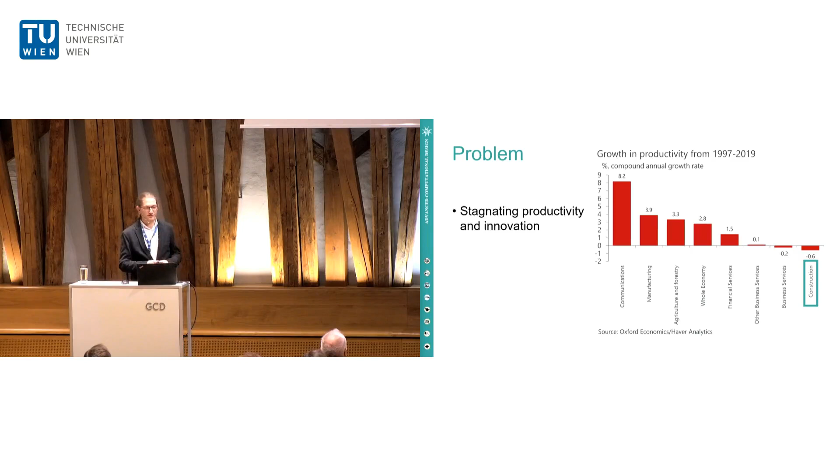And as a result, while we face these challenges of urban growth and scarcity of resources, the vast majority of AEC still uses conventional processes and standard wasteful materials, causing a huge ecological impact. So the obvious solution to this problem is to create digital design tools for the early design phase. I mean, you have seen many digital design tools already for later design stages, but we are talking about the early design phase. And this is obviously using the field of information and communication technology, where you have seen that our dean gave in the opening address the reasoning for that.

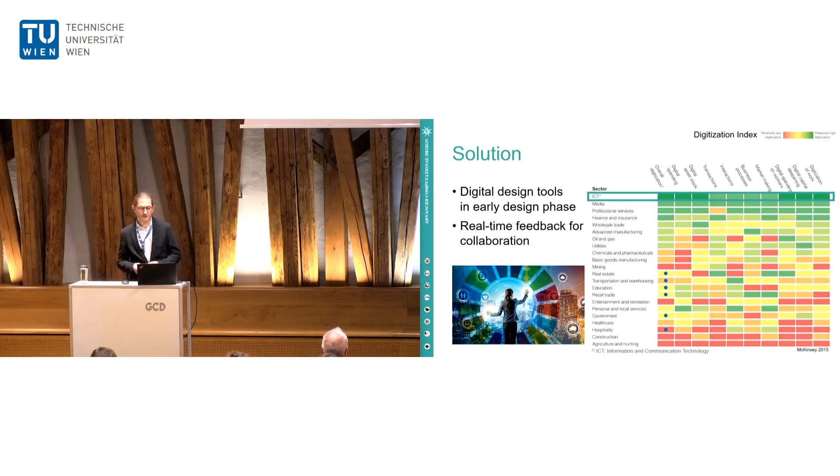So such tools would allow real-time feedback and communication on design choices across different disciplines at an early stage of a project where there's the most impact. However, the computer scientists developing these tools, us, often lack the domain knowledge, leading to suboptimal solutions. In fact, none of the big software companies in the industry have even tried offering such tools for the early design phase so far. So this is where our project comes in.

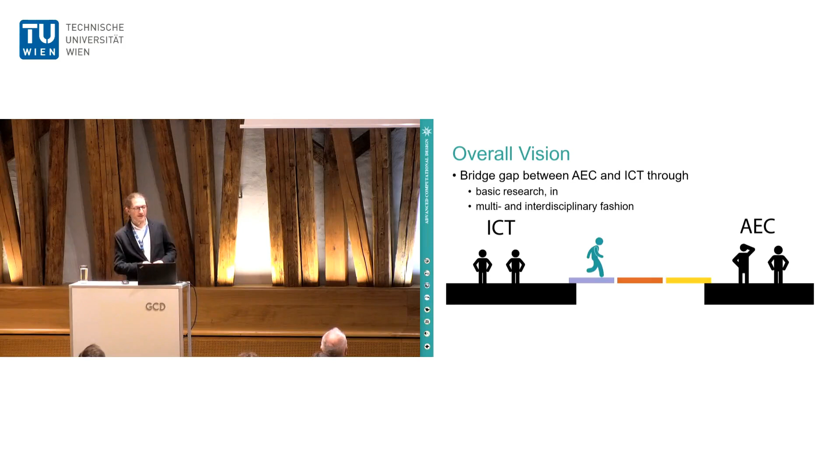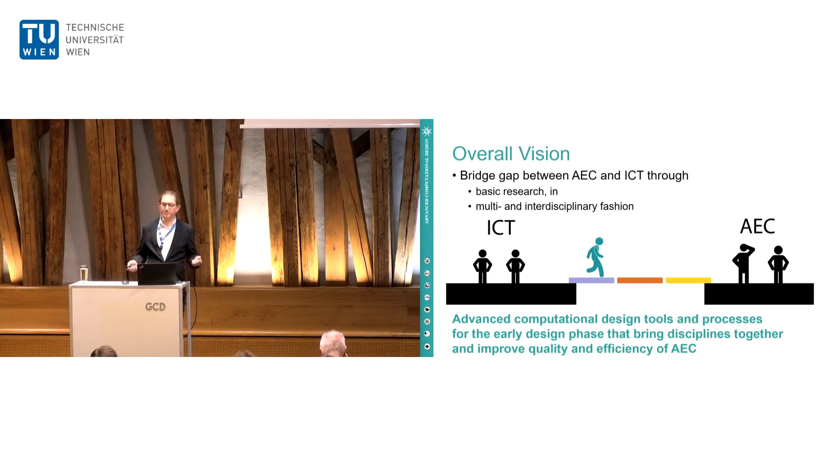Our overall vision is to bridge this gap between AEC and ICT in the early design phase through basic research in a multi- and interdisciplinary fashion, as you have already heard in the introductory address. Now, for more than 3 years, the SFB Advanced Computational Design has been developing such tools and processes for the early design phase to implement that vision. Tools that can bring disciplines together and improve the quality and efficiency of AEC. So this requires work in 3 primary areas.

First, design methodology in order to provide the primary interface technology to the human designers and specialists. So we deal with the question how they input design ideas and communicate with each other, but also how to integrate computational tools from all other disciplines. And the second is visual and haptic interaction in order to provide feedback for decision support and communication at all times during this early design phase.

And third is form finding, or the actual realization of design intents in actual objects that have geometric, kinematic, or physical properties. So roughly, the first area covers the input side of a design project, the second one, the output side, and the third one, the processing or simulation side.

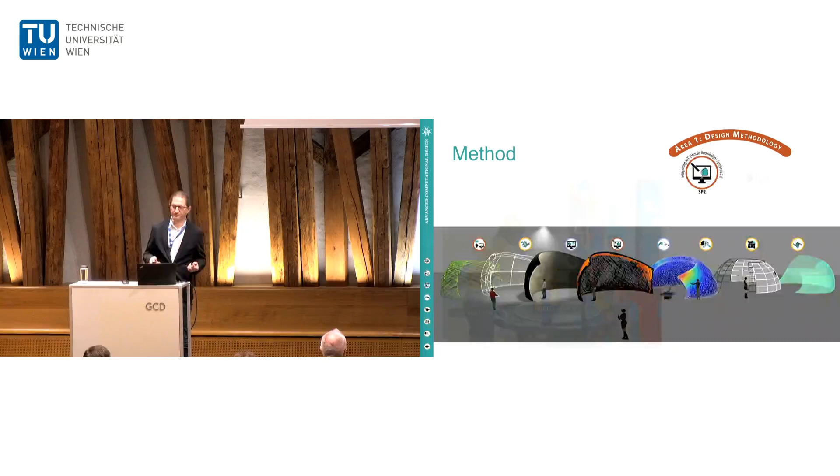In more detail, in this area 1, we follow two complementary approaches of design methodology. On the one hand, we are working on transforming implicit design intents given by sketches on 3D drawing canvases into geometric surface models. These surface models then serve as explicit representation for integration with the computational tools. And on the other hand, we look at a more physical interaction to create variations of volumetric point clouds using machine learning, allowing the exploration of larger and more abstract design spaces. And more details on that will be presented later in this session.

In area 2, at any point in time, the current state of the interaction is presented to the user as accurately as possible. On the one hand, visually, through a real-time simulation of light propagation through the scene, and on the other hand, also through the haptic sense, allowing users to experience the boundaries of architectural spaces or material properties like elasticity. So you will learn details on the robotic system we developed later on in this session.

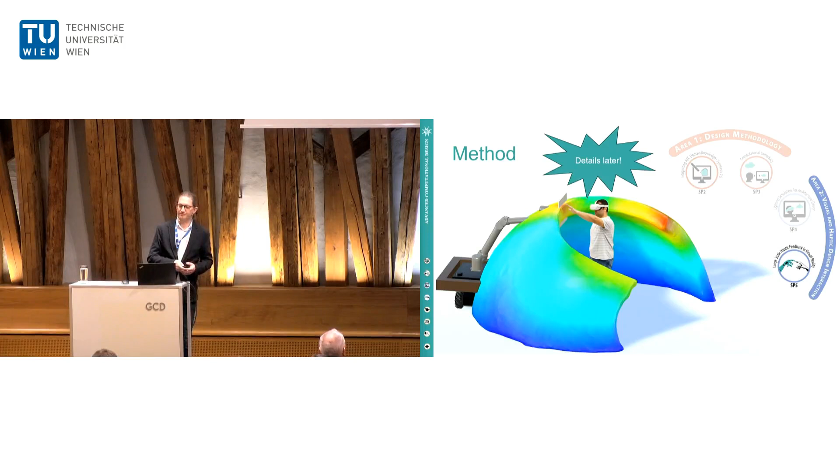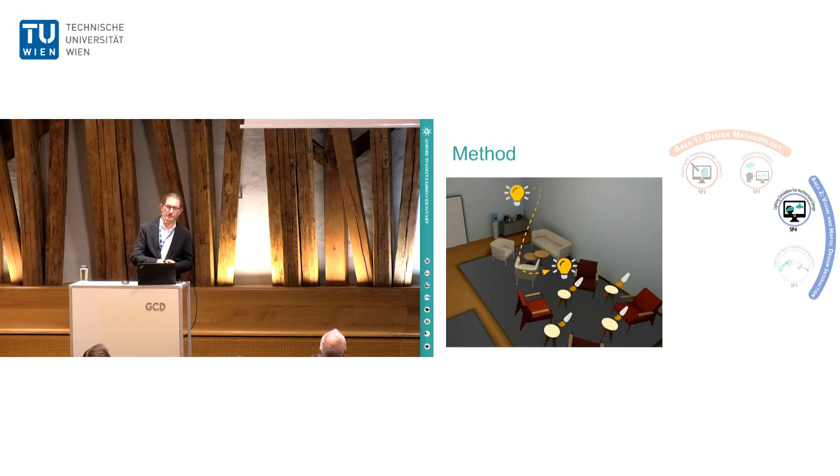Going back to the visual interaction, this also works in a reverse sense. By specifying desired illumination properties, the simulation can be used to calculate the required illumination setup through a novel differentiable light tracing method. And we also extended the approach to simulate thermal radiation, as will be presented later in this session.

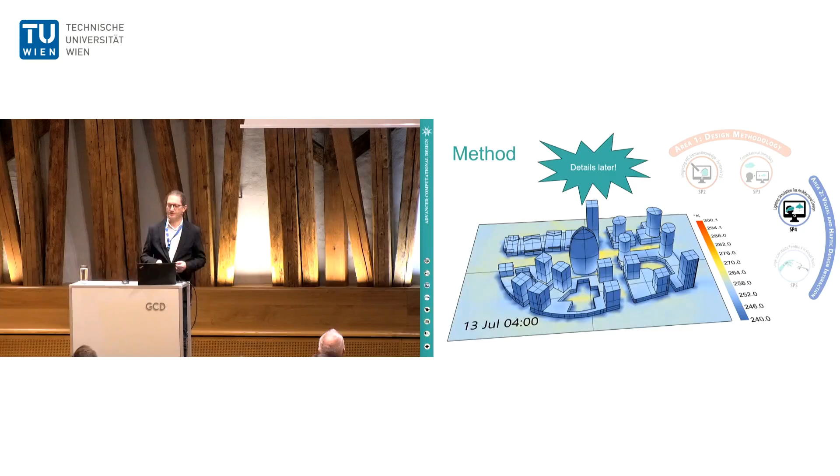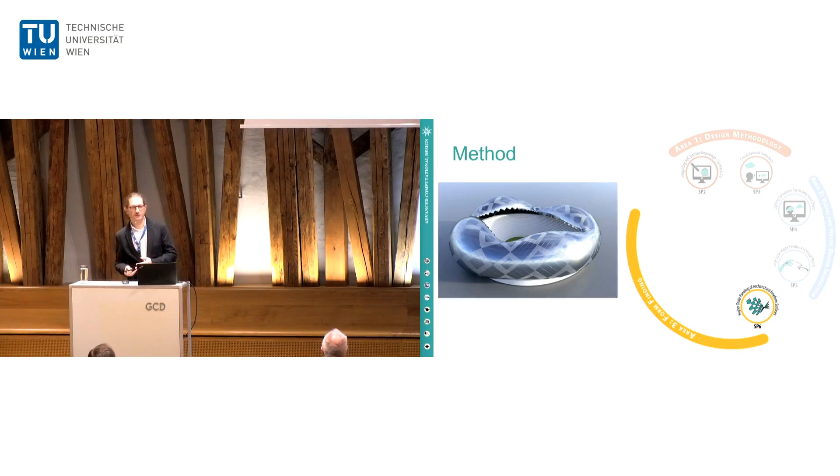In area 3, form finding, instead of deferring the complex geometrical and mechanical computations to a later stage in the production pipeline, our approach is to integrate form finding already in the early design phase. For example, the possible ways a freeform surface is discretized into panels determines the feasibility, efficiency, and cost of a construction, ultimately with an impact on sustainability. But we also go beyond static surfaces and find innovative ways to transform quad-paneled surfaces with applications to novel lighting and shading solutions, foldable assemblies, as you have seen in the first keynote talk as well.

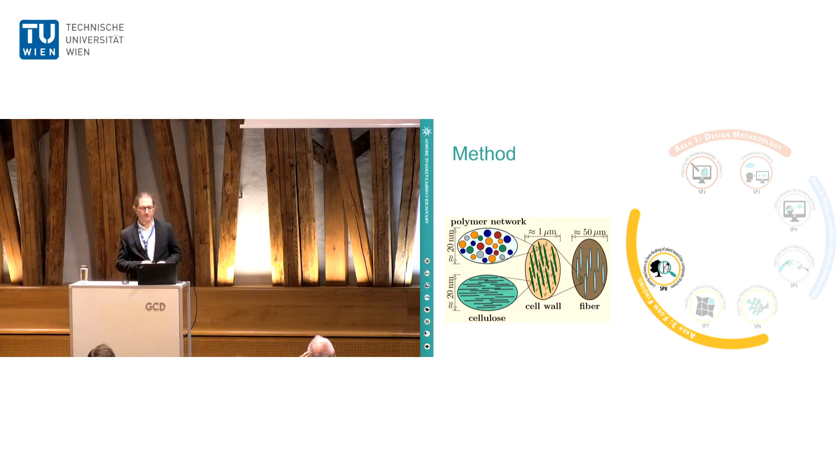Besides geometry, looking at the structural behavior of design is essential in order to introduce new and green materials, like so-called plant-based biocomposites. For these materials, we developed a multi-scale model to simulate their behavior much more efficiently. And in particular, later in this session, you will learn how we analyze the formation of cracks in these materials.

Finally, we verify theoretical results experimentally by fabricating or building them, which is really important. But also we experiment with completely new materials like clay or mycelium and their potential for sustainable construction. The properties of these materials are then analyzed again theoretically. All of these projects are tightly interlinked, of course, as presented by this connection star.

And to achieve all this requires a multidisciplinary team, so I can introduce the people who are working on this project. At the beginning of the project, luckily, we were all able to build on this collaboration that was initiated by Helmut Pottmann here in the form of the Center for Geometry and Computational Design, which is the symposium we are having here. And then we extended this with knowledge in architectural design and material experimentation from University of Innsbruck and TU Graz. In total, the project encompasses 4 faculties: computer science, mathematics, architecture, and civil engineering. So I will show you now a few of the examples of how we worked together and achieved more than the simple sum of the project.

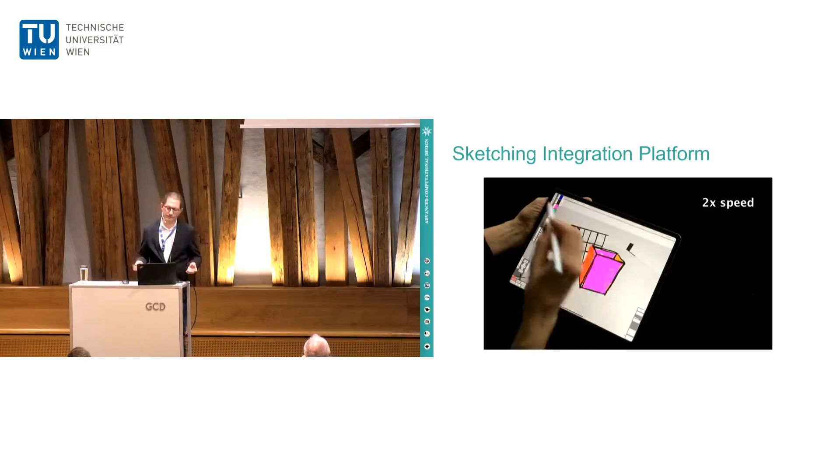So first of all, we have created a sketching platform as the central hub of all the sub-projects in the SFB. This platform allows users to sketch in different modalities, like on an iPad or in virtual reality. In particular, we have identified how architectural designers like to sketch, using different stroke types for the boundaries and the surfaces. With contributions from geometry, we developed algorithms to convert these sketches first into segmentations and then into curve networks and finally into geometric surfaces.

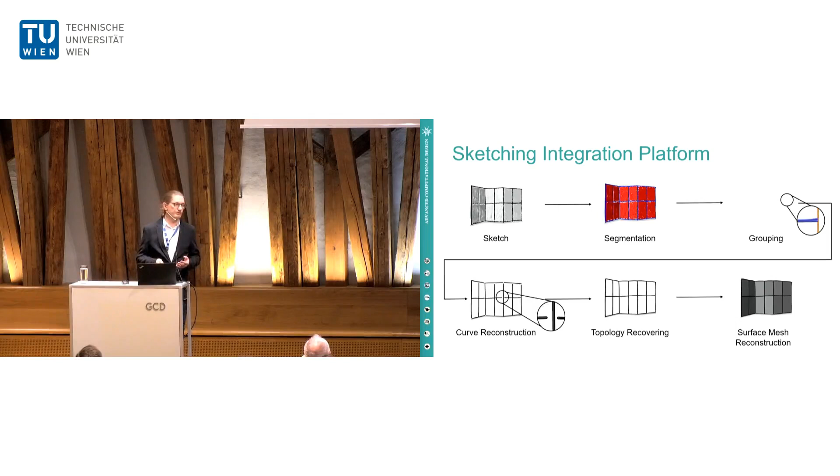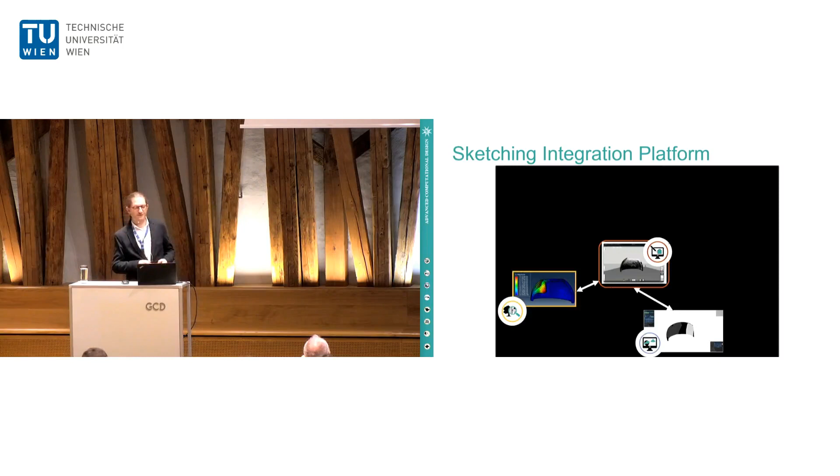The sketching platform then uses these surfaces to communicate with simulation tools. For example, with lighting simulation to compute optimal lighting conditions, with structural simulation to compute stability for different material choices, and with geometry simulation to compute different panelizations or transformable variations. The platform can also convert point clouds to geometry, and all of this will be reflected in the app and shown to the designer. And in certain modes, like virtual reality, the feedback will not only be visual, but also haptic, or real, through fabrication. And again, 4 of these topics will be presented in more detail shortly.

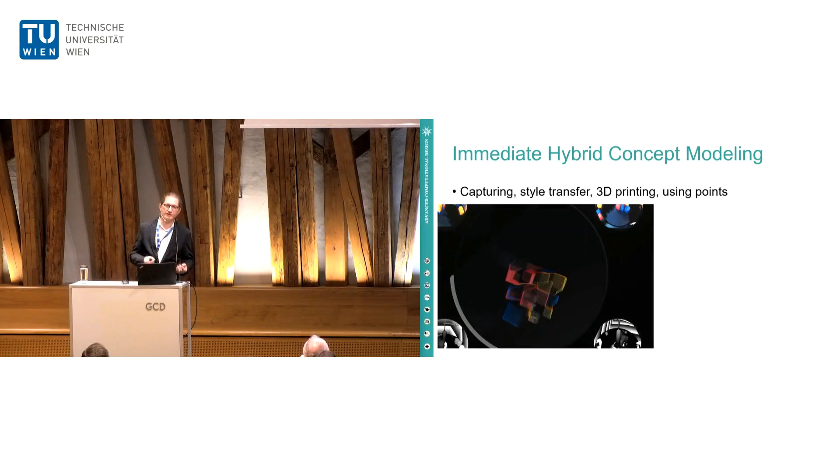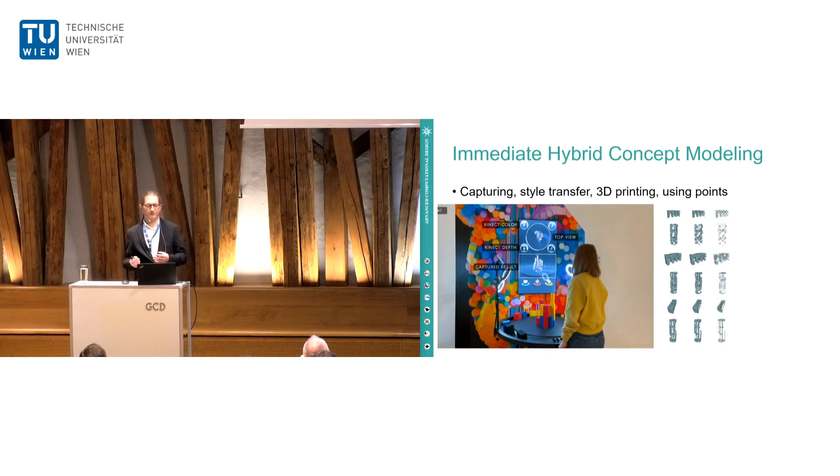As an alternative to sketching, we also collaborated in a more immediate hybrid concept modeling workflow based on point clouds. So here a feedback loop is established between the physical and the digital modeling. Through style transfer algorithms, the user can modify the point clouds according to different inputs and create variations, and also influence the material distribution, which is only possible since the algorithms also generate the internal structure of the point clouds.

And this in turn also allows evaluating the structural performance directly on the point clouds. And finally, the generated point clouds can be directly fabricated using a novel point printing workflow. And putting all these different elements together, we obtain a material-informed design framework, which equips designers with the necessary knowledge about design implications, starting from a sketch or a physical input.

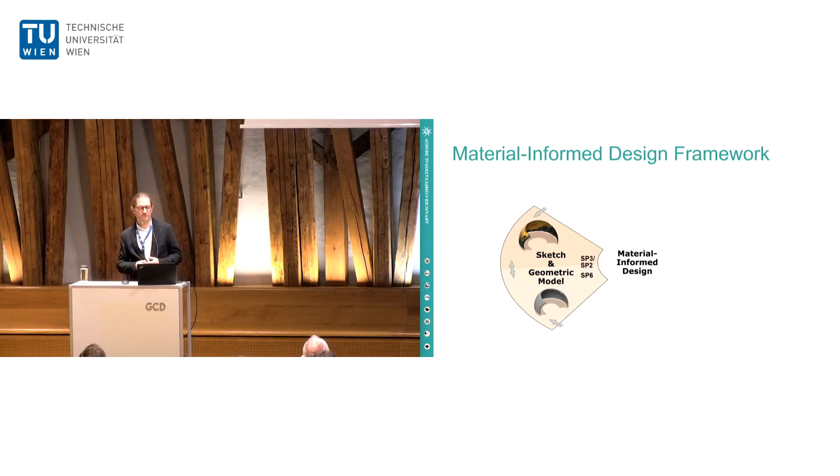The sketching platform or the concept modeling platform computes a geometric or point-based model, and this can then be interpreted by a structural analysis module for overall structural feedback, and by material models, for example, our novel model for plant-based biocomposites, which provide the mechanical input parameters.

The design can be visualized in virtual reality using realistic light simulation, and a novel origami structure positioned on a robotic arm allows for immediate haptic feedback on the structural stiffness. The framework also adds an important physical materialization step where prototypes of both materials and geometry are actually fabricated and presented to the user.

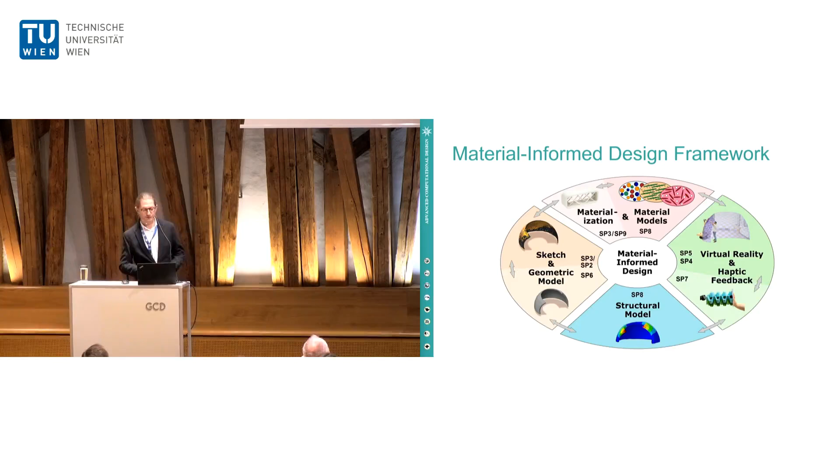So in summary, our overall vision is to develop advanced computational design tools and processes for the early design phase, linking design methodology, visual and haptic feedback, and form finding through basic and multi- and interdisciplinary research in order to improve the quality, efficiency, and sustainability in AEC.

And this is the team of PIs last week in front of the Austrian Science Fund before we gave a part of this presentation and other presentations, and which will decide on whether we'll get another 4 years of funding. So please wish us luck. Thank you.

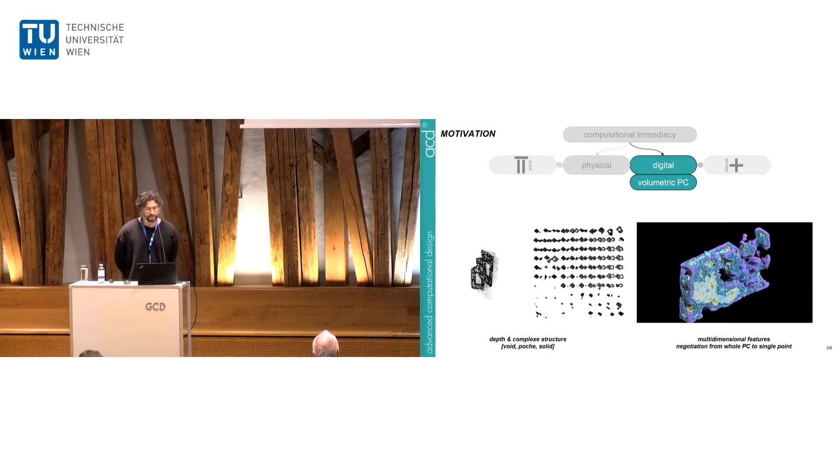Volumetric point clouds can be described as point clouds defined through their volumetric entity. Volumetric point clouds have a depth structure. They can be described by void portions, poches, solid areas, their skin, and their signals. Volumetric point clouds describe objects from the largest particle to the smallest, starting from the whole to the single unit. They are carriers of multidimensional information, such as color and distance to neighbors, and can thus describe different conditions, which we call attributes and features.

In summary, one of our main motivations is to apply real-time 3D machine learning assisted design workflows based on volumetric point clouds. Basically a process that utilizes unstructured point clouds as input, provides manipulations through different trained volumetric styles, such as lattice structures using an autoencoder, and enables conceptual models with informed multidimensional features as output.

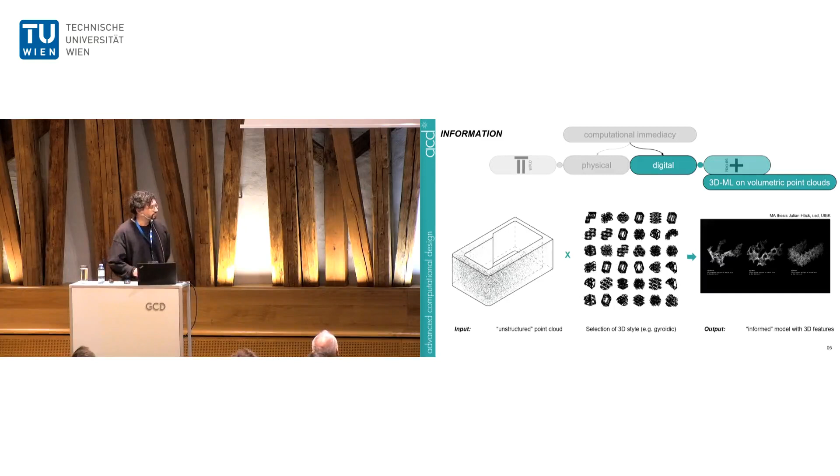The point cloud tectonics thesis builds on the computational immediacy research and connects to the hybrid physical and digital workflow being developed. The particular interest lies in considering how robotic fabrication based on volumetric point clouds informed by digital design features can encode and decode attributes that make the point clouds a design medium for volumetric conceptual models.

Volumetric negotiation of point clouds is fundamentally defined by the application of filter patterns, such as the application of flexible resolutions of volumetric point clouds: raw, adaptive, and rasterized. So we negotiate with rasterizations, but see a large potential in raw volumetric point clouds.

There are multidimensional local features to control, and furthermore they are especially suitable for embedding porosities. With raw point clouds, there are more attributes and information per point, which we can define, for example, by the position of the neighboring points, the volumetric size, and the volumetric position with different densities.

In our understanding, tectonics refers to the relationship between parts and the whole in order to describe a totality and thus a performance. Classic components of tectonics are columns, walls, ceilings, floors, and staircases, such as in the Domino house; you can see it on the left-hand side.

Digital tectonics has raised particular interest in the age of digital fabrication, as it allows tectonics to be digitally controlled and fabricated. Especially the extension of digital tectonics by volumetric modeling creates our great interest. Here the view behind the surface begins and reference is made to the inner volumetric organization.

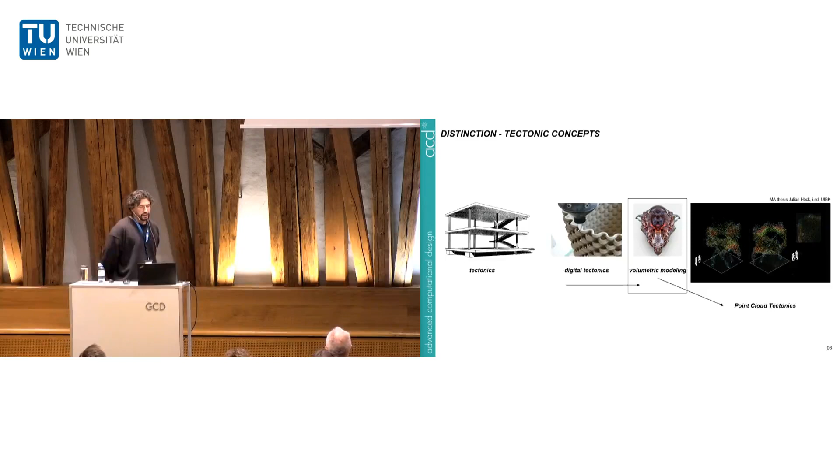Building on this, we would like to go one step further with point cloud tectonics. We see each point of structure as an elementary unit of the whole, in which the material and the internal structure can be adaptively designed. We want to zoom into the microstructure, giving each granule an individual resolution, feature, and meaning.

Continuous developments in the direct conversion of volumetric point clouds into point printing toolpaths based on informed granular data. The goal is the direct conversion of volumetric point clouds with 3D feature attributes into physical prototypes.

Volumetric methods are particularly suited for the manipulation of material distribution regarding graded and combined materials in the early design phase. We focus in point cloud tectonics on sustainable materials. In the first applications, we use clay as a point printing material.

To establish a definition of point cloud tectonics, we have created a large atlas of negotiation strategies of point clouds and concept models. This atlas is open to our students to adapt and extend technologies and techniques. Basic negotiation strategies are filtering of point clouds based on their densities, porosities, resolutions, colors, and describing tectonics by instances, volumetric data blocks, signed distance functions, or sphere packing, for example.

Design courses in particular serve to enhance scalable scenarios and expand the atlas of point cloud tectonics and how to incorporate new concepts of dealing with volumetric point clouds as design medium. In this project, the students investigated how to establish different resolutions of the inner volumetric structure by manipulating a raw point cloud in ordered octree structures. Each cell is now considered individually to create an inner structure that negotiates between void and solid.

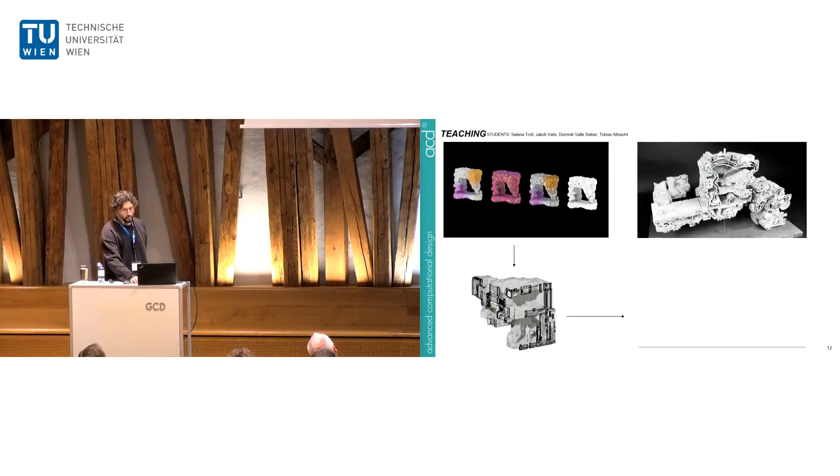In this project, the interest lies in how to inscribe transparencies in the tectonics of volumetric point clouds through a digital occupation and control of densities. Moreover, these ideas were materialized physically through studies of how to control the occupation of points through different densities, colors, and transparencies.

In this project, the focus was to get volumetric point clouds through CT scans, which were geometrically investigated. The idea is to create tunable granular data with adaptive scales from urban to human to the integration of nature, combined with a porous idea to inscribe spatialities and exposures.

Furthermore, one focus is the inclusion of natural material systems, here for example soil, in order to create different material resolutions at different scales, in the sense of a level of detail.

In contrast to teaching, where our developed machine learning tool was not applied, we used the full scope of our design workflow described before at the AEC Summer School in Stuttgart. Our goal for the design workflow concept is to explore new architectural form-finding methods by establishing immediate connections between physical and digital design spaces, from conceptual design to experimental prototyping.

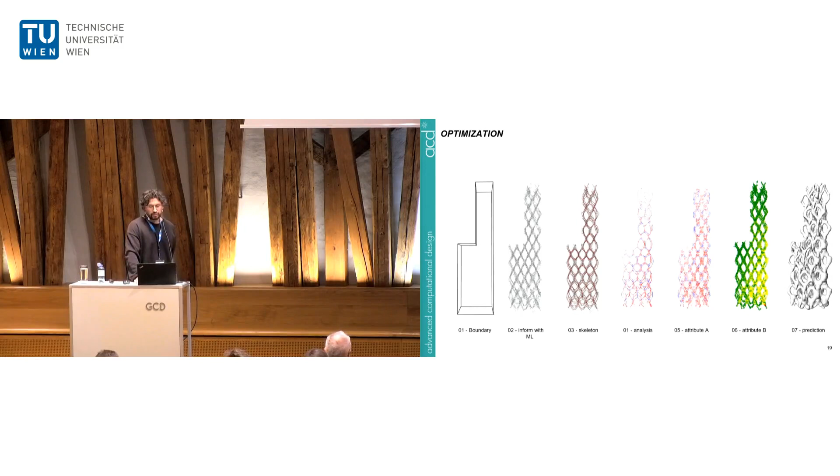The informed design served as the basis for the fourth component, the process of robotic point printing. After optimization processes of the structural position of the points, as well as the extraction of the point features, the direct printing process of the point clouds could be started. In this porous structure, the transformation from digital to physical point cloud is clearly visible.

So our goal as Outlook is to make this web application open source available next year in order to be able to upload custom point clouds within the application, which are then volumetrically filled with the 3D style transfer and can already be covered with tectonics as a preview.

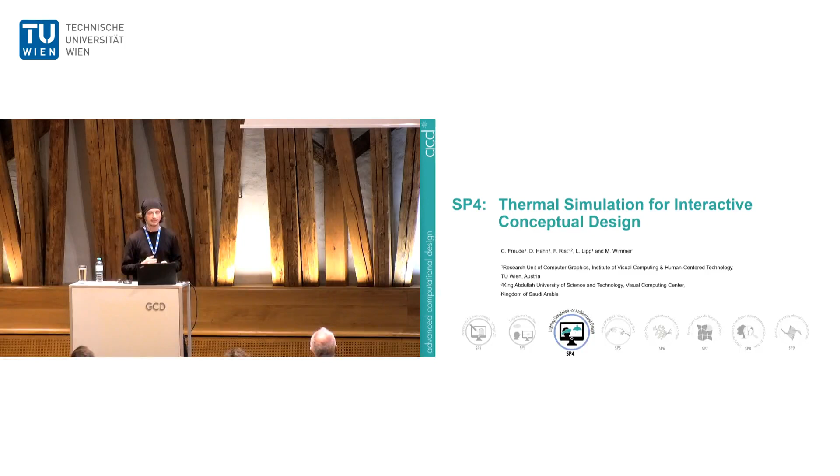Hello everyone, my name is Christian Freude and today I will talk about thermal simulation for interactive conceptual design. This project is a collaboration between the TU Wien and the King Abdullah University of Science and Technology and was initiated by Florian Rist and Helmut Pottmann. And it builds upon a rendering framework developed by Lukas Lipp in the course of the SFB sub-project Lighting Simulation for Architectural Design and was supervised by David Hahn and Michael Wimmer.

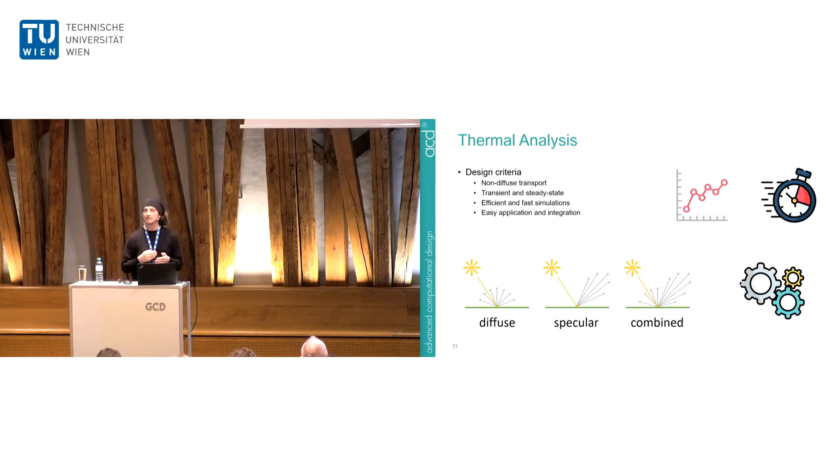And problems with the design should also be discovered early on in the project to keep the cost of required changes minimal. And therefore, we aimed for fast simulation computation to enable quick iteration and feedback, which is necessary to support the flow in the early design process. And furthermore, we wanted our approach to be easy to set up and use and be directly integrated into design tools.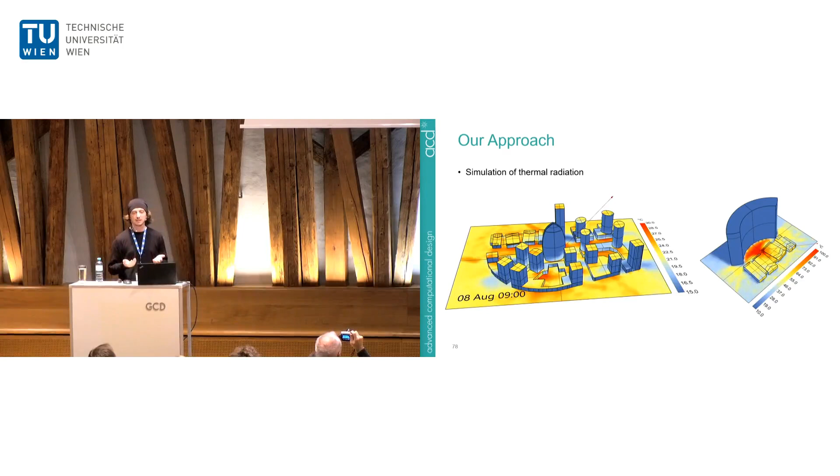With these criteria in mind, we developed our approach, which we can use to simulate thermal radiation for the analysis of designs in the early phase. And here are just two teaser images showing a snapshot of a simulation over time on the left. And on the right, it shows the analysis of a heat island caused by a building, which is similar to the problem I mentioned in the beginning. And we also integrated our approach into Rhino and Grasshopper, a popular design tool for architects.

Our approach sits at the intersection of multiple fields. It was motivated by the lack of proper tools for the thermal analysis of architectural design in the early phase. And in this domain, there are many smaller tools, each for a specific subproblem. Most related ones are for computation of direct solar radiation or glare caused by reflection of the sun in windows or glass facades. What is missing, however, are tools to simulate thermal and indirect radiation globally and quickly.

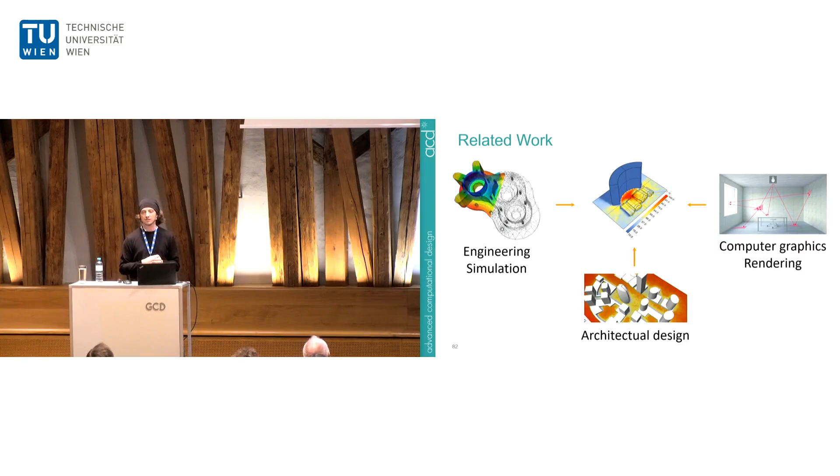In the domain of digital engineering simulation, all kinds of physical phenomena can be simulated, including radiative thermal transport, using the so-called finite element method. However, here, commonly the simulations are less interactive and often only diffuse radiation is supported. And in the field of computer graphics and rendering, fast and interactive simulation of complex radiation transport was extensively studied. However, here, commonly only the steady state of visible light is simulated. And as we will see later, absorbed radiation and temperature-dependent emission are ignored.

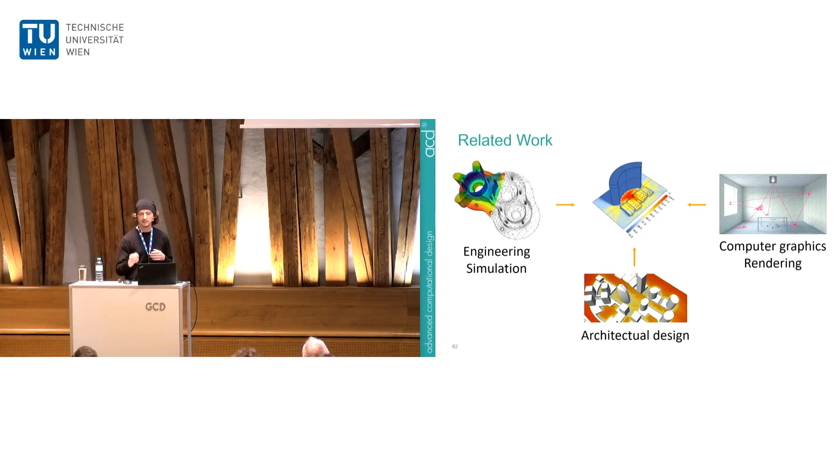So our approach tries to combine ideas from these fields to quickly and efficiently simulate transient as well as steady-state thermal radiation. Next, I want to talk about electromagnetic radiation and how simulation of thermal radiation differs from conventional rendering of visible light. So in general, electromagnetic radiation is emitted by all matter which has a temperature above absolute zero. And only if the temperature is high enough do we start to see the effect in the range of visible light.

Cooler objects emit radiation mostly outside the visible range at longer wavelengths in the direction of infrared and below. So depending on its temperature, an object or material loses energy by emitting radiation. And similarly, by absorbing thermal radiation, an object can also gain energy, which adds to its temperature. So it is this interplay of emitted and absorbed radiation which determines how the temperature of an object changes.

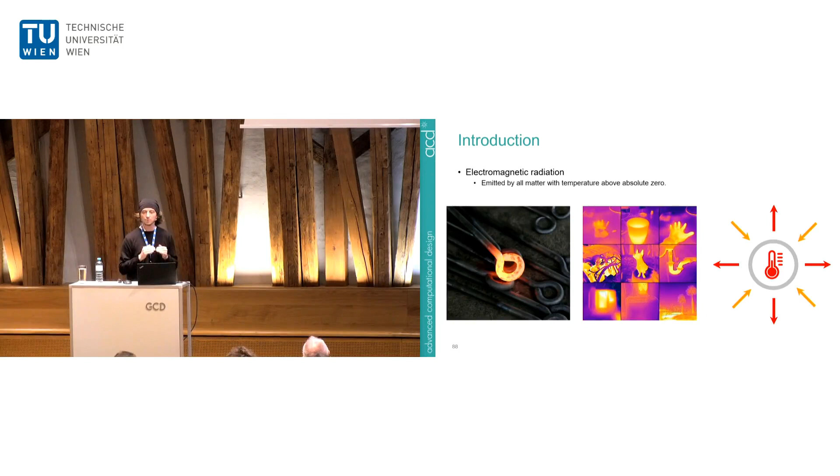And if it radiates more energy than it absorbs, it cools down, and if it absorbs more than it radiates, it heats up. Please note that here we only focus on temperature changes due to thermal radiation and do not consider convection or conduction or other physical processes. While our project focused on radiation, a parallel one at KAUST investigated convection in a similar context, which has been published at ANNSIM this year, called UrbanFlow: Designing Comfortable Outdoor Areas.

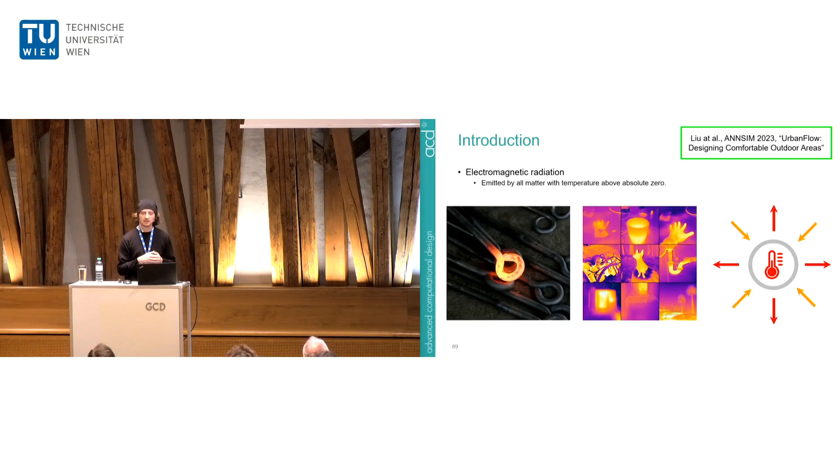So how can we simulate radiation? As I said before, we want to use ideas from computer graphics to simulate thermal radiation. However, there's a problem. We cannot directly apply methods from classical rendering to thermal radiation. To illustrate this, let's imagine a scene with some objects and a light source. This light source emits visible light because of its temperature. However, in classical rendering, the amount of emitted energy is usually directly set to some predefined value and not derived from the temperature of the object.

And to compute the illumination of a scene, this emitted light is then traced through the scene and gets stronger or weaker reflected based on the material of the object or surfaces and ends up illuminating different parts of the scene. However, two things are not considered here. First, the absorbed radiation is ignored and only the reflected radiation is considered. However, as we saw before, we need to consider absorbed radiation to determine the temperature change of an object. Secondly, in classical rendering, the emitted light is not depending on the temperature, but predetermined.

Furthermore, when it comes to thermal radiation, not only light sources are emitting radiation, but all surfaces in the scene which have a temperature above absolute zero. So in order to simulate thermal radiation, one has to not only solve the global illumination problem, as in classical rendering, but in addition also keep track of the absorbed energy and temperature globally to determine the emitted energy.

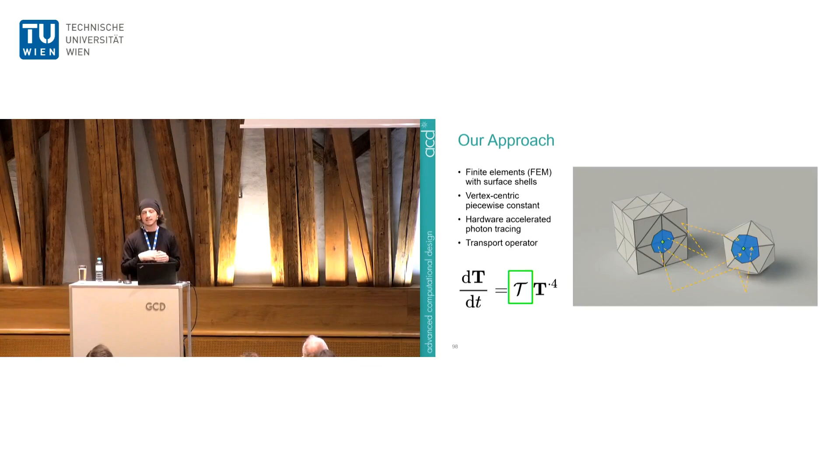And having an efficient way to compute the temperature change, we can now compute transient simulations. For this, we use the backward Euler method, and here we also apply an important optimization. As long as the scene geometry does not change, we can pre-compute and reuse the transport operator. This speeds up the computation of temperature changes over time significantly.

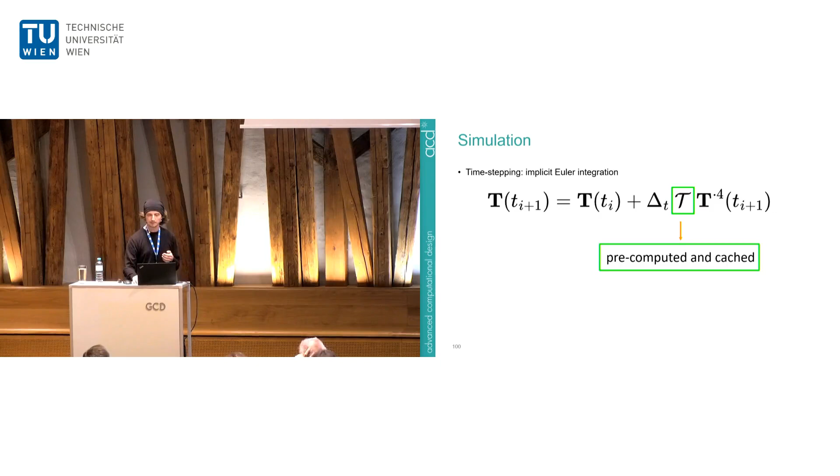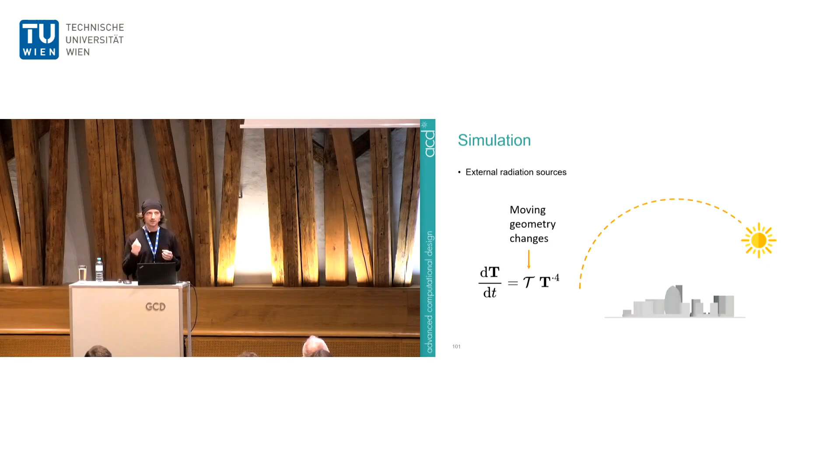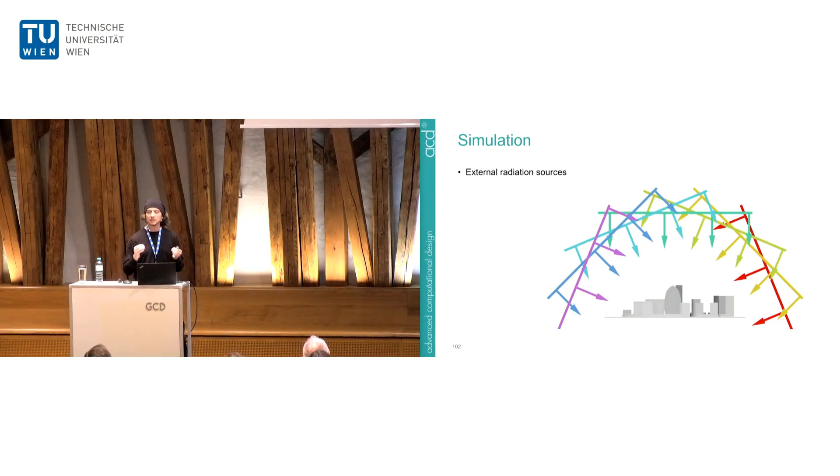However, there is still the question how to integrate changing external sources for animations. So for example, if you would want to simulate the effect of the sun and sky radiation on a building design over multiple days. The problem is that if you would choose to model the sun as a moving heat source, we would need to recompute the transport operator for each iteration because the scene geometry would change. To solve this, we instead model a sky dome as a fixed geometry, and this enables us to change the environment radiation without the need to recompute the transport operator during simulation.

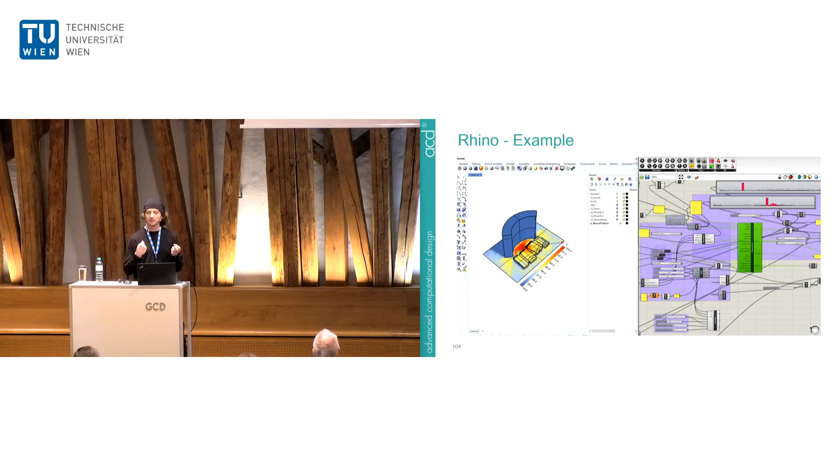Next, let's look at an example where we would like to solve the problem of a heat island similar to the building in London shown in the beginning. Here you can see the Rhino and Grasshopper interface where an architect can design a building in Rhino and then use our simulation node to run the heat simulation via Grasshopper.

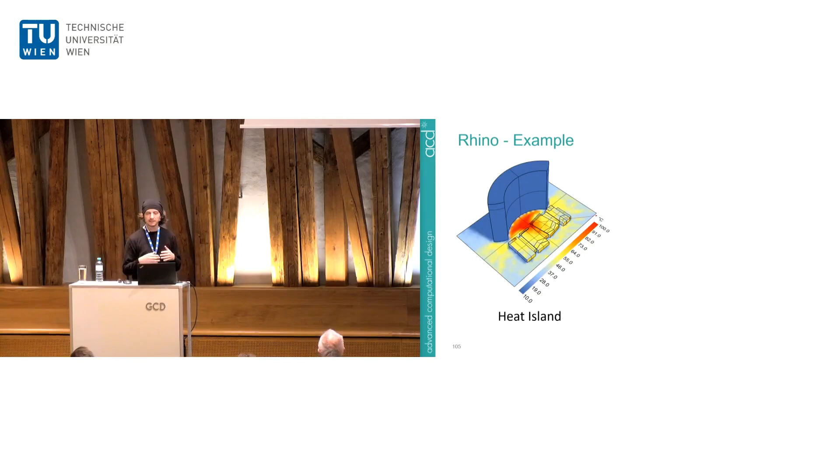This building design is similar to the one in London as its facade is concave, highly specularly reflective, and therefore focuses heat energy into a small area. For this scene, the pre-computation of the transport operator took about 4.3 seconds and the steady-state solution around 9 seconds to compute. So to fix this problem, a designer can experiment with different building shapes or materials and only needs to wait a few seconds to see if the changes helped.

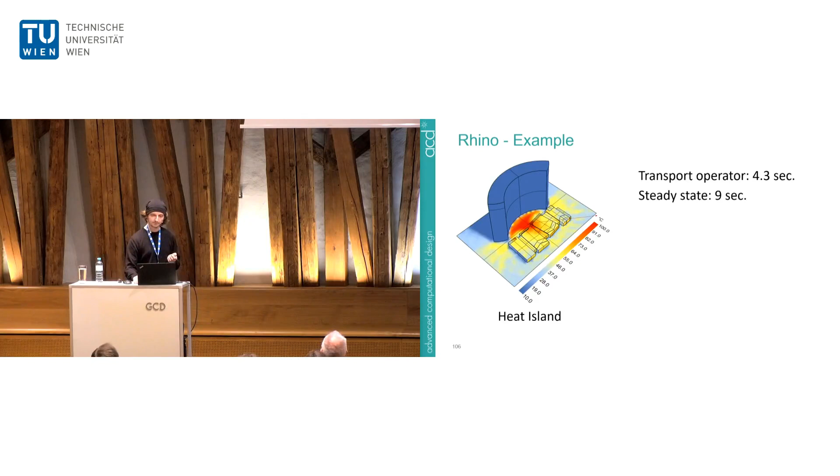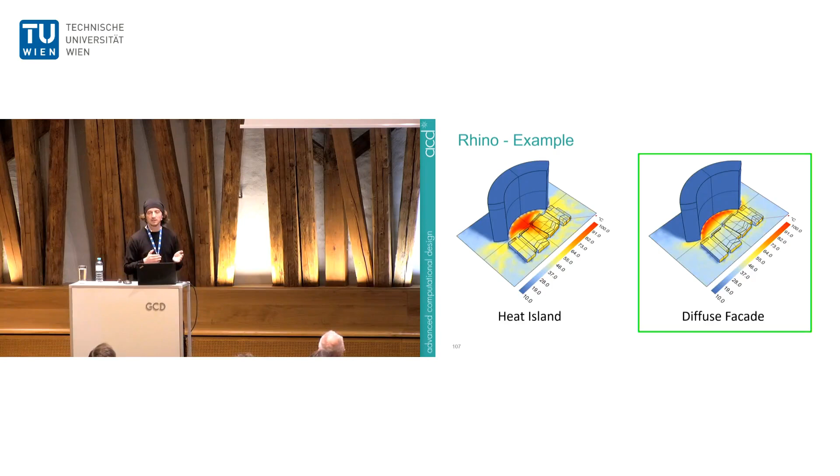One fix could be to change the facade material to be more diffuse and scatter light. And in this case, the heat island on the neighboring building is gone. But what if for some reason a diffuse facade is not wanted or not possible? Then a designer would need to change the shape. One alternative would be to get rid of the concave shape altogether. But this might be a bit drastic, and maybe one wants to keep the shape more interesting. A less radical change would be to add a convex element to divert the radiation, like seen here, and this also helps to get rid of the heat island.

So with our approach, it's possible to easily simulate thermal radiation for different designs and analyze them in an early design phase. To summarize, our approach can be used to efficiently simulate steady-state as well as transient radiation, supports non-diffuse transport, and is integrated into Rhino and Grasshopper. Our efficient thermal solver is possible due to the pre-computation and caching of the transport operator, the acceleration of photon tracing via RTX hardware, and integration of environment radiation as fixed geometry to avoid recomputations.

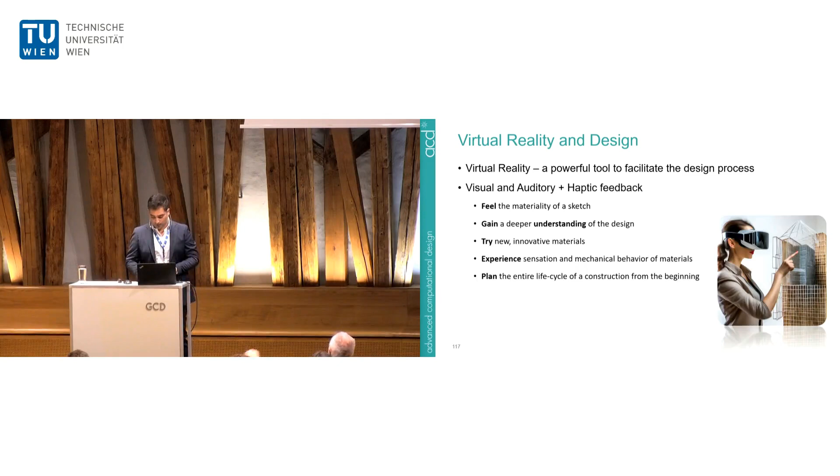This brings me to our haptic system, Cobodeck. Cobodeck is an immersive virtual reality haptic system with free walking support, meaning that a designer can get into the virtual environment and still walk freely in the physical environment. Then these users can really touch virtual objects. How is it possible? We use an industrial-grade cobot, which stands for collaborative robot, a special type of robot, in order to present a physical prop at a physical position for the designer.

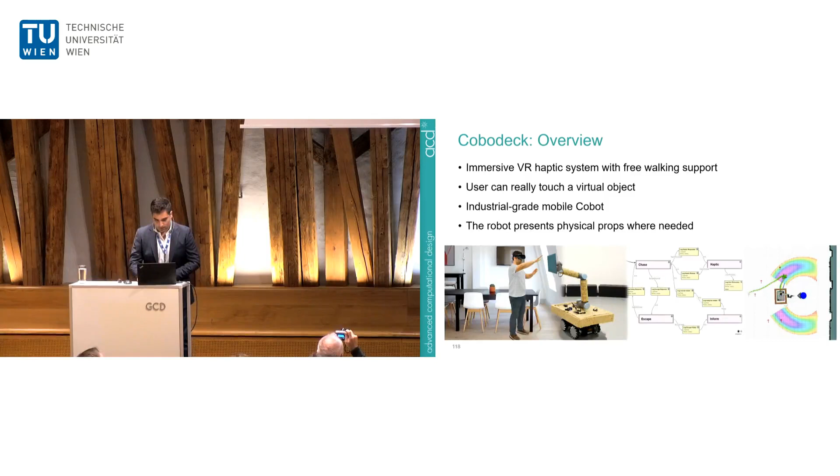Cobodeck is actually a system made of so many different components and subsystems that collectively, from one side, control all the virtual environment and everything that is related to the user, tracking the hands, and on the other side, all the subsystems that help the autonomous robot to navigate in the system and function.

I'm sure everyone is familiar with the term autonomous robot, but in case you don't know in the robotic background, autonomous means that the robots need no interaction with the user and no intervention from a human, and they can decide and function without any human intervention.

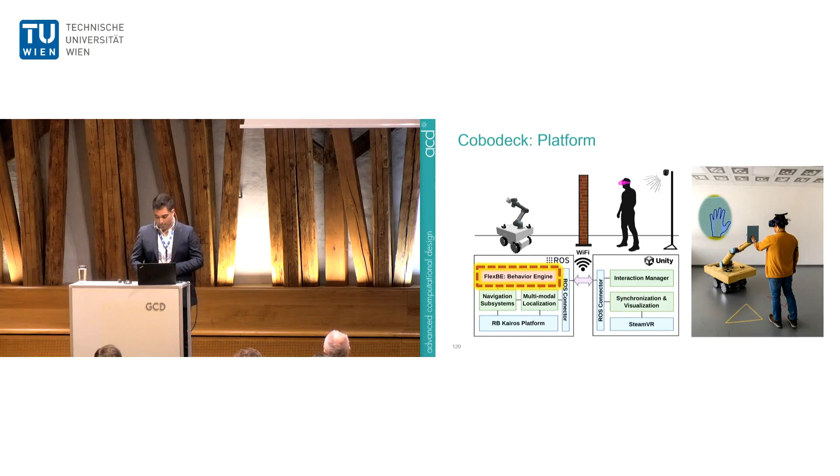Out of all the subsystems, I want to talk about the main part that is most interesting to me. I want to share it with you. This is the major part of the brain of our robot. We call them behaviors. Behaviors are like modes in which the robot reacts differently to the surrounding environment. We actually inspected all of the different scenarios and designed and implemented 4 different behaviors for a robot.

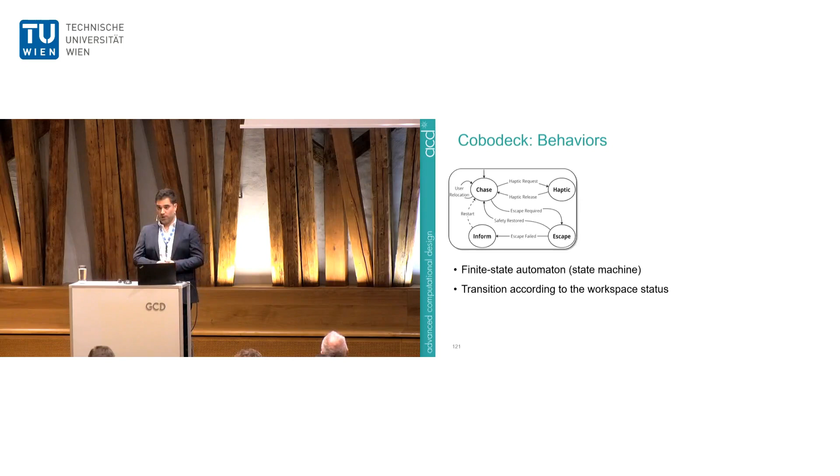These behaviors are actually organized in a state machine structure, and the transition between the behaviors or states of the state machine happens based on the changes in the status of the workspace. These behaviors are, first and foremost, the main purpose of the system, which is haptic. When haptic behavior is activated for the robot, this means that the user needs to interact with a virtual object. Therefore, the robot needs to position the object, this haptic prop, which actually presents the whole or a part of the virtual object for the user to encounter.

But once the robot is not in use for any haptic interaction, we don't park the robot in a corner of the room, because we want to actually shorten the amount of time for the next haptic interaction. That's why we follow the user, or so-called chase the user. But we don't do this chasing blindly, because as you know, and as I have also mentioned, the user is in virtual reality, immersed, and doesn't know anything about the position of the robot. Therefore, the security and safety of the system is very important for us.

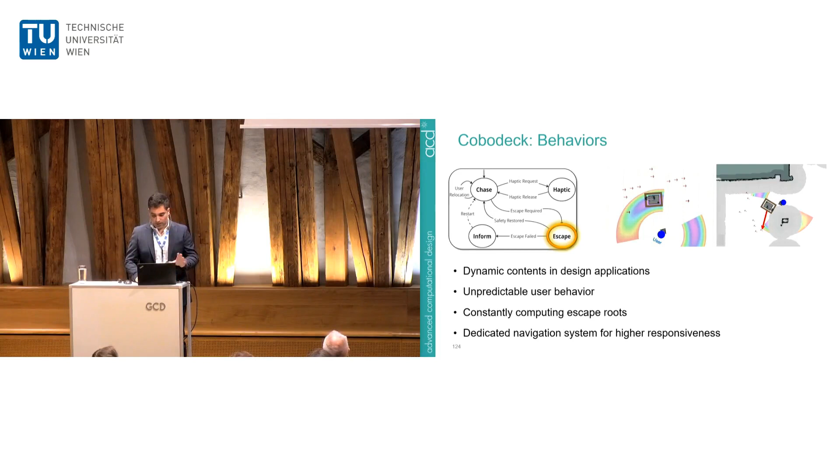Something that is very important here is that in escape we have special requirements. That's why our robot uses a dedicated navigation system that is much faster than the normal one that is used by the other behaviors, in order to make sure that we escape the path as soon as possible for the user.

But with all of the things that I already mentioned, there could be some special cases like when the robot is stuck in a corner of the room between the wall and the user, and the robot has no option to escape. In such cases, our system informs the user by visualizing the robot for the user and warning the user about the upcoming potential danger.

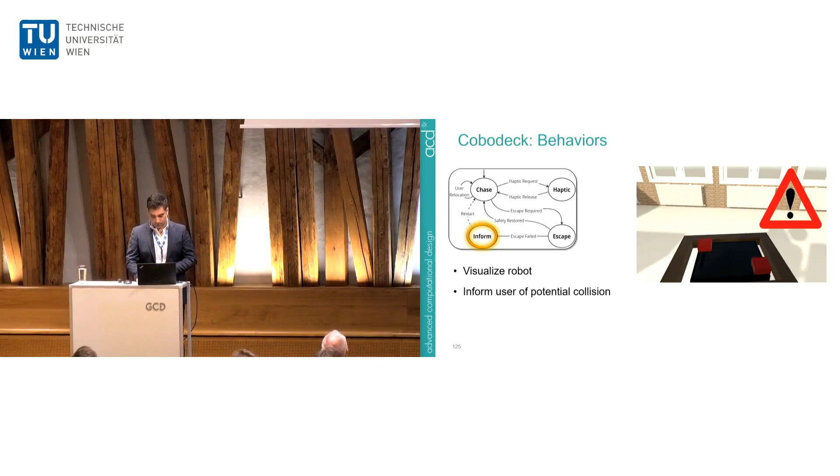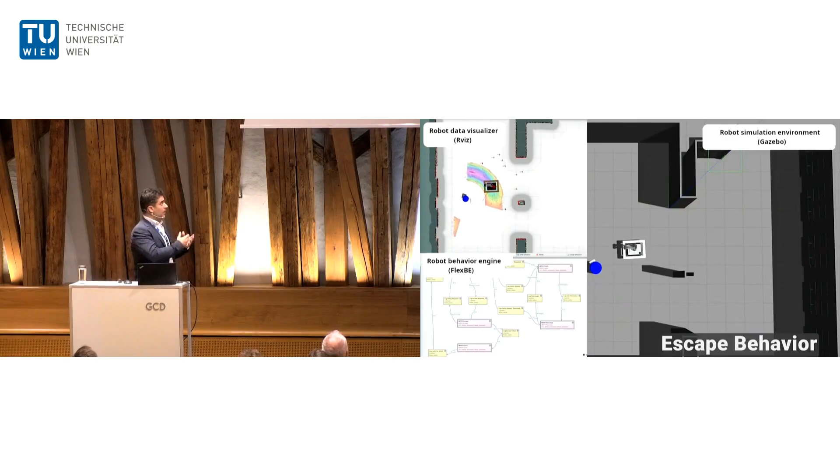Here in this video, you see all of these behaviors that I talked about in both simulation environment and in physical environment. For instance, here you see how the robot unblocks the user's path. Here you see that the robot in the physical space is keeping distance to the user and following the user around. And once the user wants to interact with a virtual wall, the robot drives in front of the user and places the haptic prop at the position that is required.

And if the user wants to actually explore the whole wall, the robotic arm follows the hand of the user in order to give the feeling that the user is touching a much larger surface.

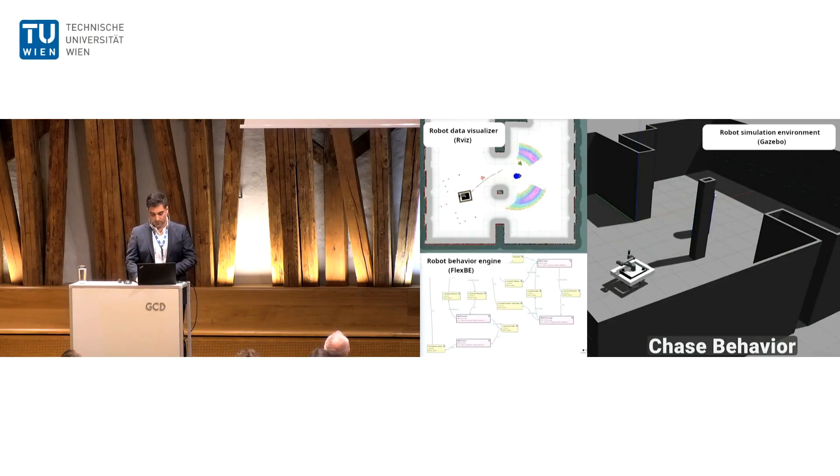As you probably have guessed, we have very unique safety requirements in this system because this is officially the first time that a user and a robot, even a collaborative robot, are put into a small system, into a shared workspace, while the user is completely blindfolded and has no knowledge about the current position or velocity of the robot.

Therefore, none of the relevant industrial standards work for us and cover all of the scenarios. That's why we conducted a full risk analysis and we collected some safety measures, formulated them as guidelines for anyone who wants to work on robotic and robot-based virtual reality haptic platforms.

But having access to CoboDeck, which is capable of positioning haptic props in different positions of the room, and at the same time having access to data from very precise force and torque sensors of the robot, allows us to go one step beyond visualizing and rendering only static objects haptically. Now we can even go toward the simulation of numerical deformation of the material. This is how it's done.

The user applies some pressure on the haptic prop that is attached to the robot, it measures the amount of force that is applied by the user, it does some computations in the background, and it just applies the correct amount of resistance back in order to simulate the numerical deformation of this specific material.

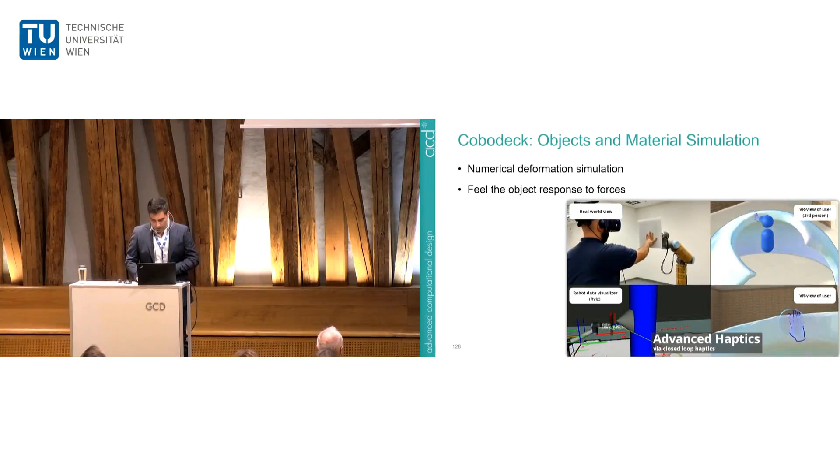Based on the evaluations that we did and published in high-ranked virtual reality conferences, CoboDeck brings significant improvement over all existing solutions for haptics in virtual reality in terms of flexibility, the size of the workspace, maximum force feedback that the robot can handle, and versatility of the tools and shapes that it can represent. We also have shown that our behaviors led to a safer workspace for the user, a faster haptic response time, and we could lower the amount of energy that the robot needs to navigate in the system.

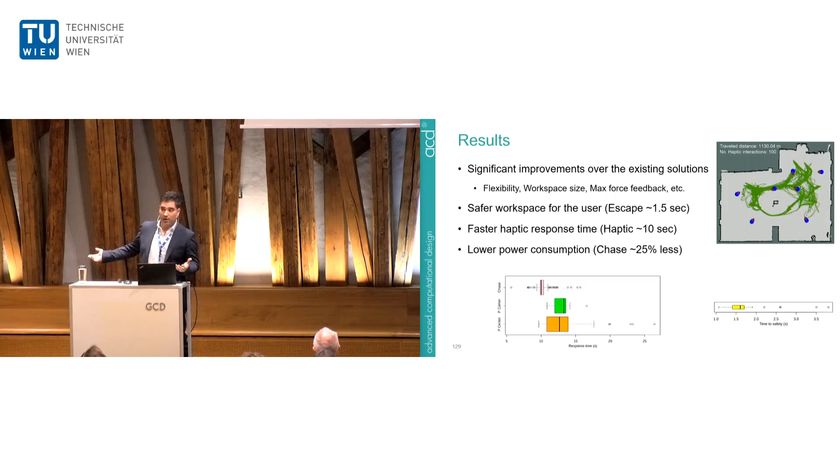If you are wondering, an escape for the robot takes around 1.5 seconds from the moment that it detects that the user is unknowingly approaching the robot until the time that the scene and workspace is safe again for the user. And it takes around 10 seconds after the detection of the interaction for the robot to provide the haptic feedback. Also, with our chase behavior, we saved around 25% of the energy compared to a normal park and drive approach.

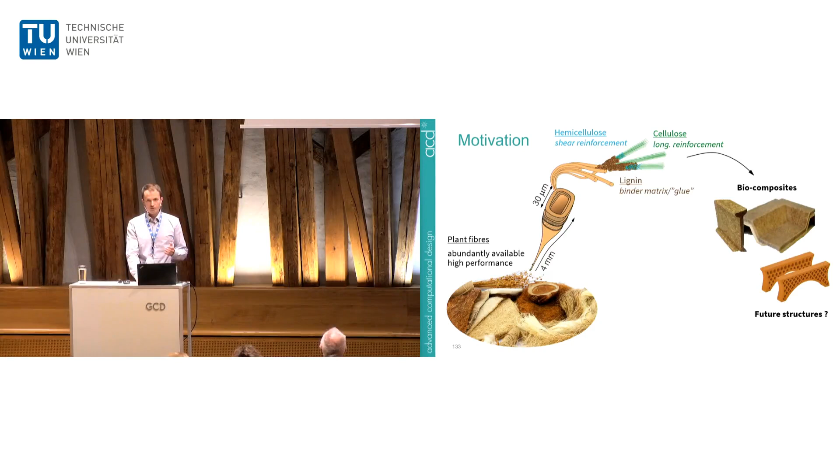These basic building blocks can be extracted and reassembled, or we use just plant fibers which are already strong themselves and combine them with biodegradable polymers to build new materials, so-called biocomposites. And we envision these biocomposites to be used in future construction projects. However, this huge range of potential biocomposite combinations means we need sophisticated and reliable models to predict the material performance.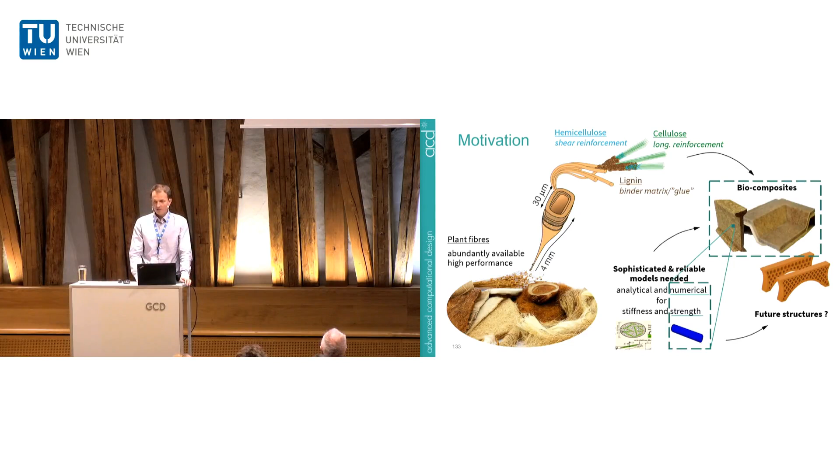There exist different methods to predict material behavior for stiffness and strength, and in this presentation, my focus will be on the numerical modeling of strength at the microscopic level. And for these models to be effective, we need to understand first how failure in these materials works.

Generally, when testing new materials, their strength is usually tested by just pulling them apart, where you measure the load and the displacement and plot them against each other. And the shape of a test specimen could look like this here. And if you zoom in, you can see the individual components, in this case here in gray, a natural fiber embedded in a biodegradable matrix.

And this is now how the ultimate failure of the biocomposite can look, if you pull just hard enough in this direction. And just before this failure, you may observe some micro damage in the individual components, but what exactly happens here inside? We can further distinguish between three main failure mechanisms. First is fiber rupture, where the fibers themselves fail. Then there's matrix softening, where the glue or the polymer surrounding the fibers degrades. And then there's interfacial failure, where the bond between the fiber and the matrix weakens or breaks.

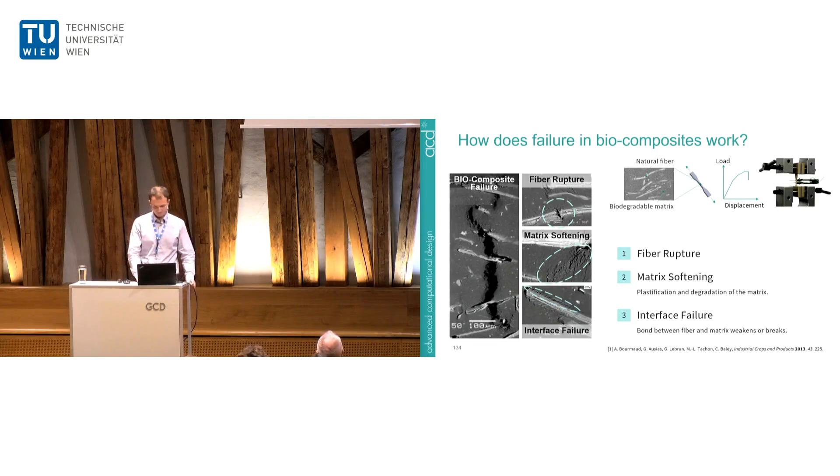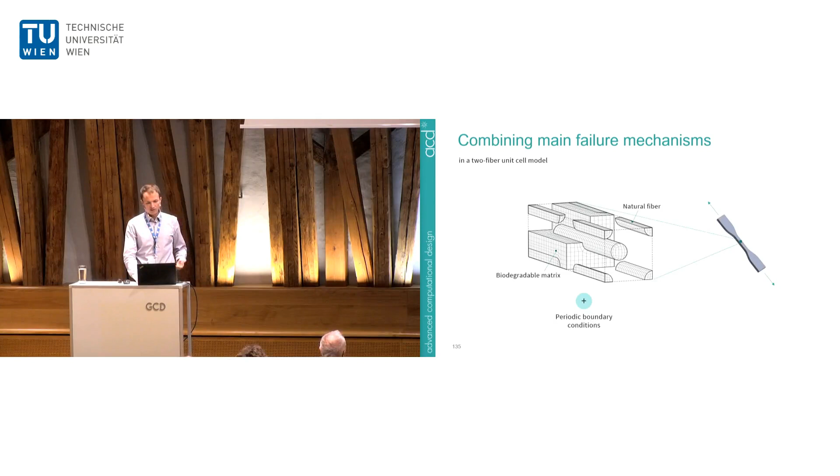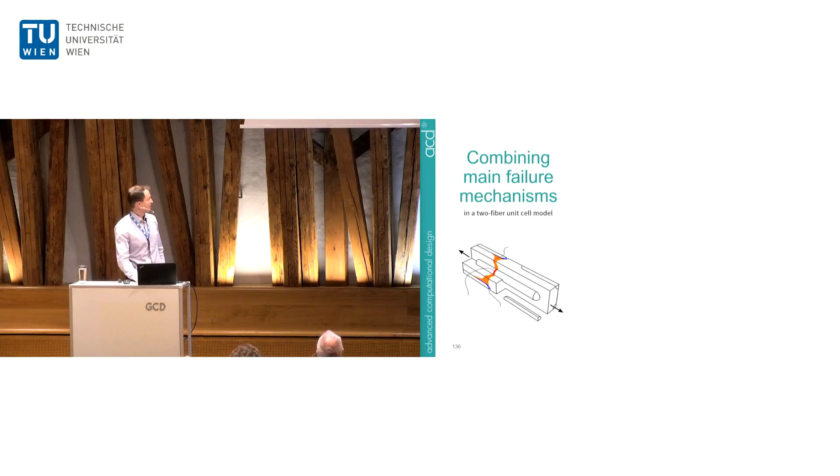Now that we know what the real world looks like, we need to find a reliable way to capture all those effects in a numerical model. We decided to model this with a 2-fiber unit cell, which is periodically repeating endlessly in all directions, with one fiber in the middle and the other one split into 4 parts, but joined together again because of this endless repetition of the unit cell. So now we've defined the geometry of the model, and now we try to find some laws to replicate the observed behavior of the composite.

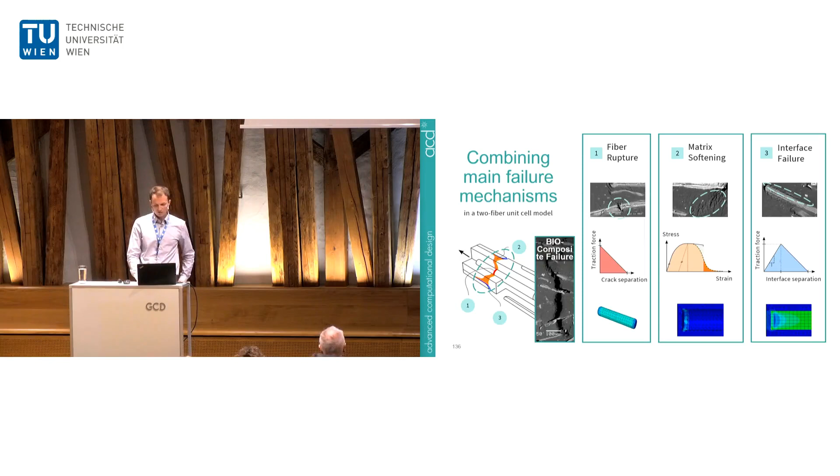For the fiber rupture, we have the so-called traction separation law, which basically says if a certain stress level in the fiber is exceeded, then a crack is initiated, and this stress then gradually decreases until the fiber gap is fully opened. And we define quite similar material laws for the other effects, for the degradation of the matrix and for the debonding of the interface. All those damage mechanisms act together, some more and some less, depending on the individual components, until the biocomposite is fully torn apart. And we now have a model at hand to fully simulate such post-crack behavior of biocomposites, which has actually never been done before.

So now I want to show you what such a simulation could look like. Here I have a model where we purposely put a weak fiber in the middle to show what the model is capable of. On the left, there's a load displacement curve as in a real tensile test. On the right, there's a visualization of the model box, which is cut in half to better understand what's going on inside. On the top, you can see the stresses in longitudinal direction, and below some equivalent strains of the matrix material.

So a first crack is initiated in the fiber, resulting in this load drop, but the surrounding matrix is still capable of distributing all the forces, which allows the biocomposite to bear even more stress. But starting from this fiber crack, the matrix gets slowly damaged, and parallel to that, there's a second fiber crack growing, and suddenly the whole composite fails, where various failure mechanisms grow together.

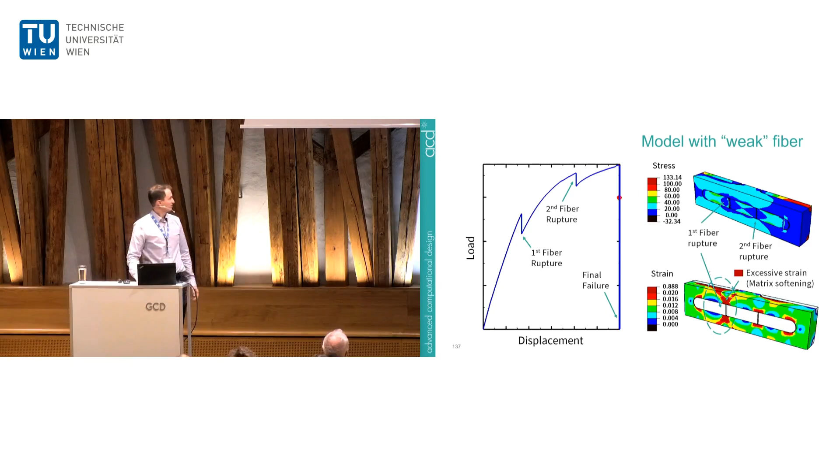So what is this all good for? We now have a reliable model, and we have tons of possibilities to make parametric studies or mix different materials together, which could be a very tedious task if you want to do this in the real world. Maybe we want to know if the biocomposite can get any stronger if you get a better bond between fiber and matrix. Does it even matter? So one question could be, how does the fiber-matrix bond influence the overall biocomposite behavior?

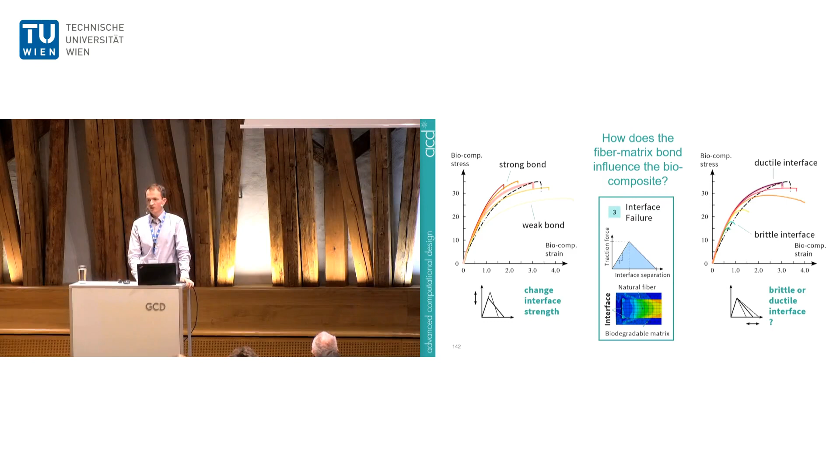So all of this was just one part of our research, and with our interdisciplinary partners, another main goal in our research is to help designers and decision makers and provide them feedback in the earliest design phase. And one sub-project developed this 3D sketching platform, as you've seen before maybe, and we linked our knowledge regarding materials and structures to the sketching interface.

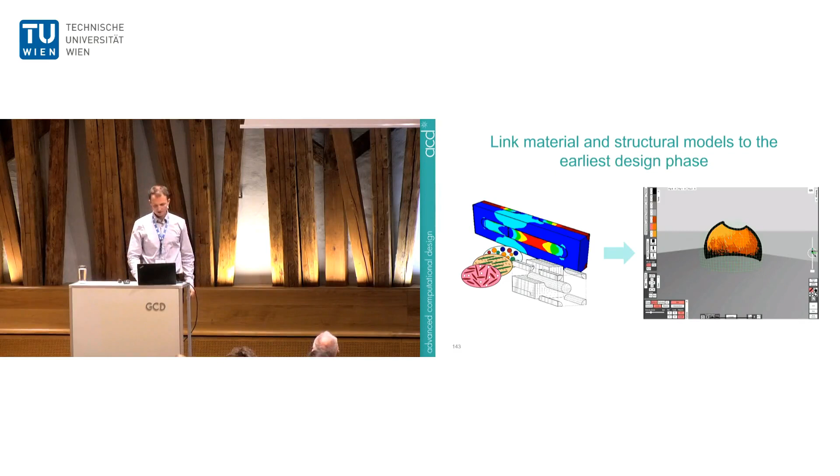And for this, we developed a material-informed design framework, where you first have a sketch. For this sketching platform, we provide a material database with some predefined biocomposites. And this sketch has then to be translated into a suitable geometric format, which is done with a machine learning algorithm from our partners, Subproject 2, to be able to do structural simulations with the finite element method.

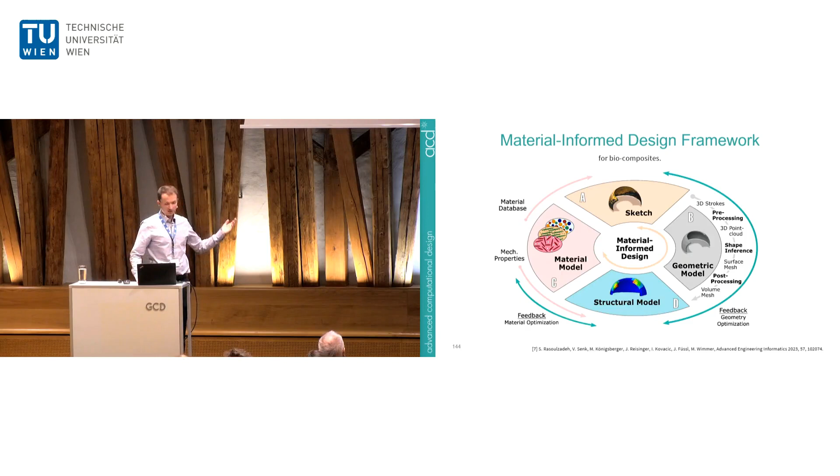And for this structural model, again, the material model is needed, where we specifically provided a multi-scale material model, developed also at our institute. And then with this information, you get immediate feedback. Do you need to optimize the material? Do you need to find a better geometric structure?

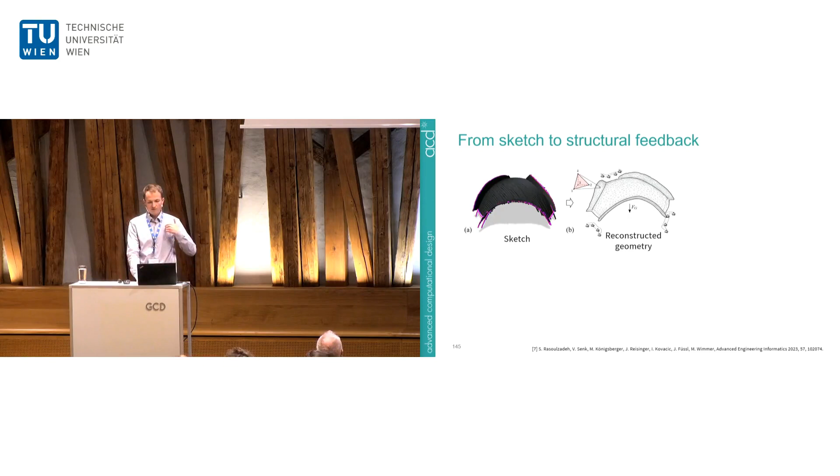And one quick example here: starting from an initial sketch, the algorithm translates the 3D strokes to a 3D volume mesh. The designer has to define boundary conditions, loads, and material. And then the designer gets the first feedback. The red areas here indicate that these areas are above the critical stress limit, given the structure and the chosen material. And then the designer can now redesign the structure or reiterate through different materials. Or, for example, they can even just say to align these fibers to the principal stress direction, which then, in turn, gives optimized results.

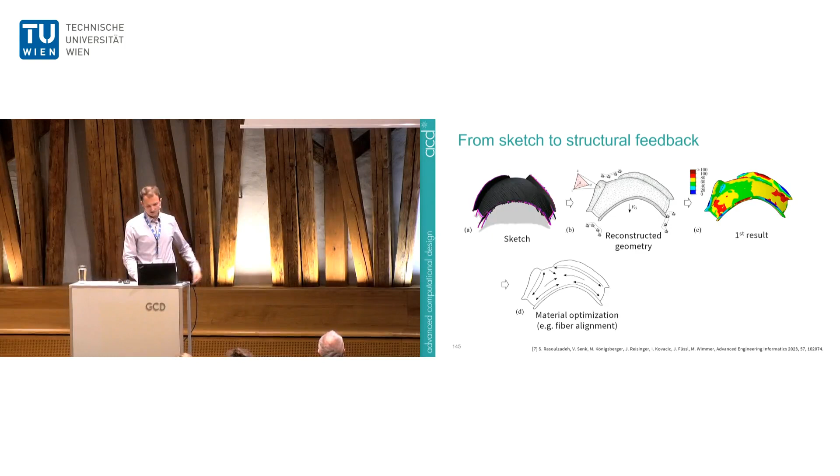So in summary, we are able to predict reliable biocomposite material behavior and link this to the earliest design phases. And in the future, we'd like to extend our interdisciplinary collaborations even further and link many other fields together in order to support designers and engineers in the earliest design phases.